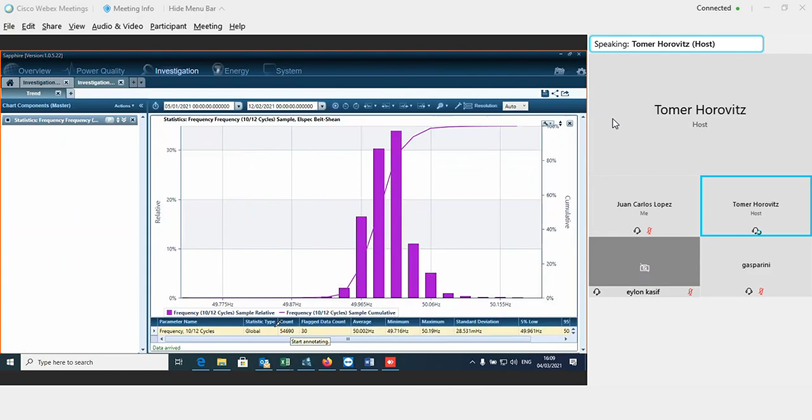When I'm saying all measured values, this is the number of values - 54,690, that I have in this period from the 5th January until the 12th January. Sorry, let me - this is from January to February. Let me take 1 week, as we said before.

So the counts are 10,078 values. This is the number of values we have in this period.

Now, this is the name of the parameter. And then we have this number, which is 2, for flag data count. Remember that I told you that in case there is a specific event, the system can or cannot, according to the user definition, ignore those values. So yes, we have two values which are being ignored.

And now the average is 50.006. The minimum reading is 49.81 and the maximum reading is 50.19. We have the standard deviation. Now the next side is the 5% low and 95% high. This is a concept that many times we use in the compliances.

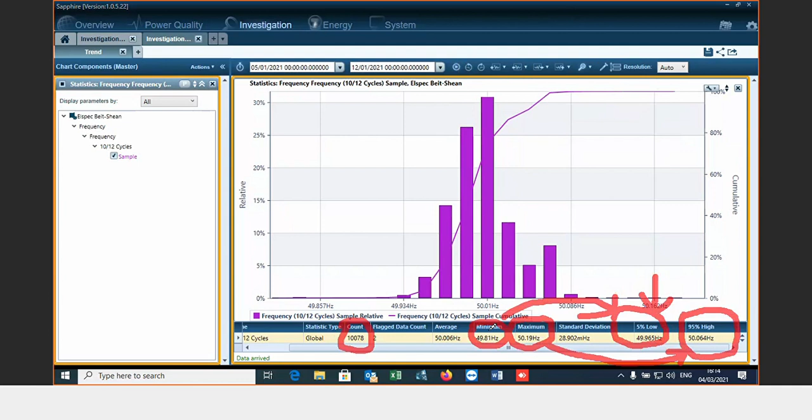Where you see the 5% low, it basically means that if you have, let's make it round, 10,000 readings, this is the minimum of the 95% highest, or the maximum of the lowest 5%. So you are removing the lowest 5% of readings, and vice versa with the 95%, ignoring the highest 5%. So this is the absolute maximum - the reading here will be a little bit higher than the readings you see here. And this is the absolute minimum, so it will be a little bit lower than what you see here. Clear? Okay, perfect.

So we now understand the lower part. Now let's go back to here. This fat bar indicates how many readings or values within this week, from those 10,000 readings, were between 50 hertz and 20 millihertz. So you can see there are 30.74% of the readings - that's like 3,000 readings.

And here, between 49.943, within those about 20 millihertz, you had 3.19% of the readings. Then we have this line. The line basically means as you move right, you go higher with the frequency, even to 50.086. So 99.86% of the values were below this value, and 0.14% were above this value. So obviously we will get to 100 here.

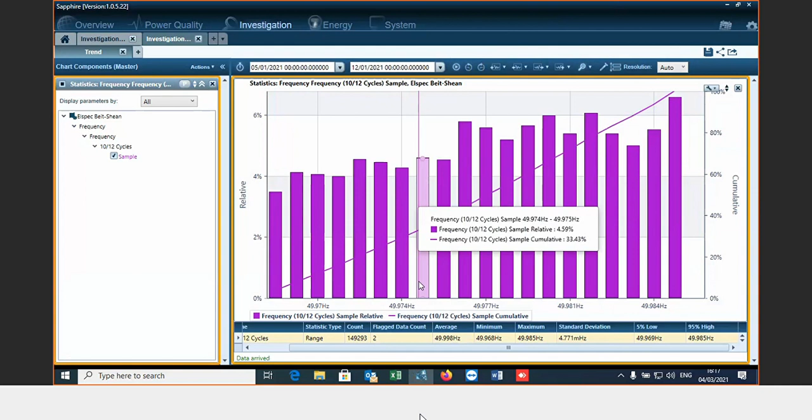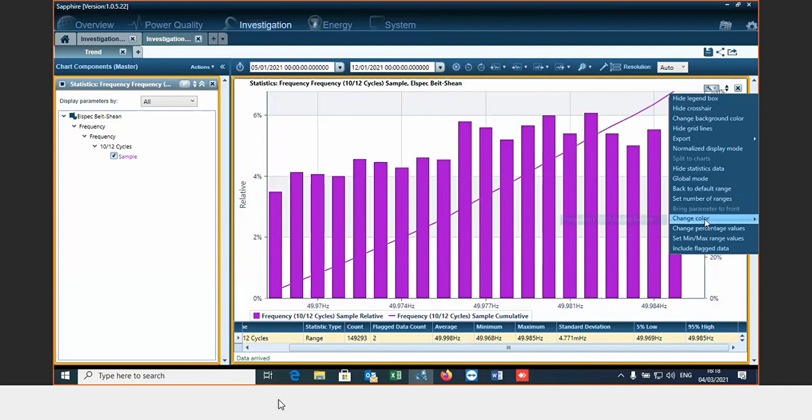Okay, then we can go back to default view, to the initial view here. And maybe one - include flag data. Remember, we told you it is ignoring 2 readings. In some cases it can be much more, but here only 2, but you can include the flag data. Then the 10,078 turns to be 10,080.

Sorry, it was not 10,080. It was... let me take... I think it's much more than that. I'm not sure how I can expand this. But okay, you understand the flag data concept.

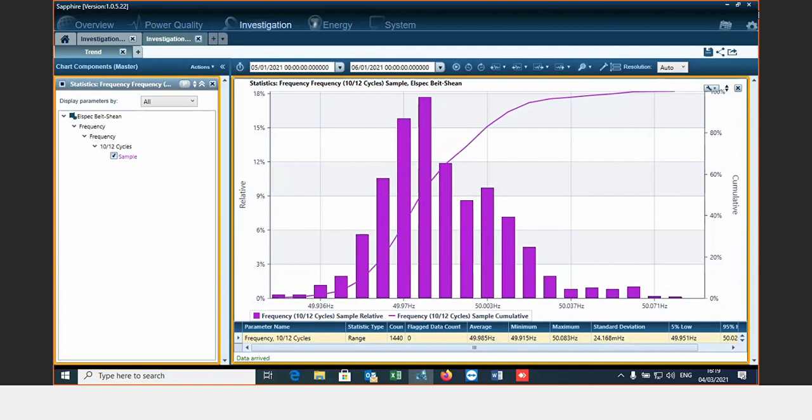Then you have change percentage value. We talked about the 5% and 95%. You can also switch this to 2%, so then you will see the 49.951 hertz change to 49.943. Also, you can change the 95% to something else as well.

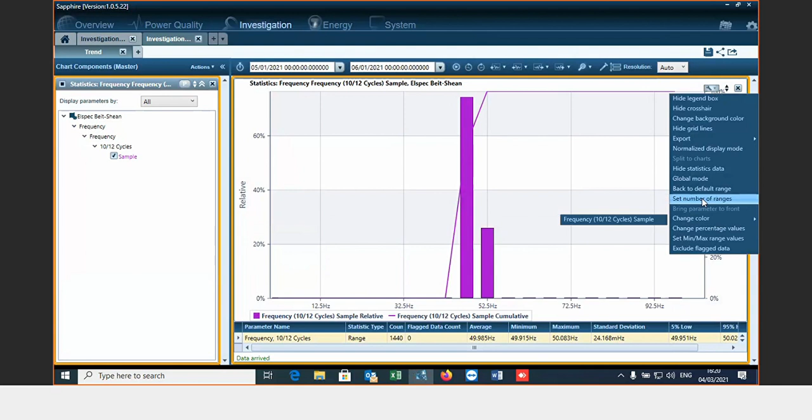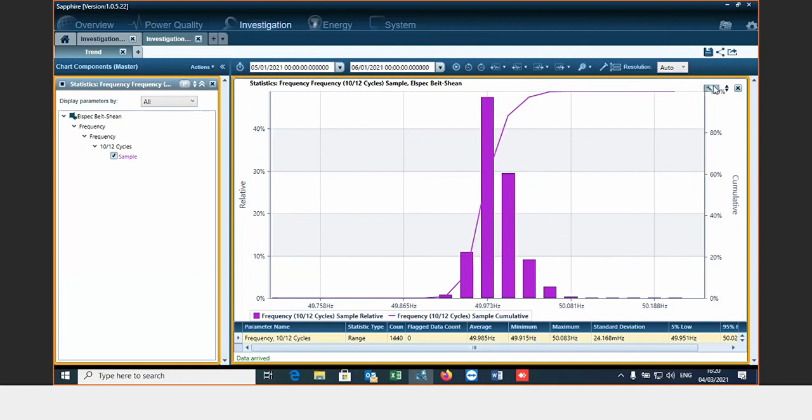Set number of ranges - okay, let me zoom in. By default, I think we have 24 bars, but we can change it to have more bars. So if I have 20, I can, for example, put the maximum - it's 48, but let's say it's 50. So now you can have much more bars. Okay, hide statistics data - this is pretty clear.

Any questions about the statistics chart? No, for me it's very basic. Okay, okay.

I have a question, Tomer. Yes, just a general one to understand.

Only I think managers maybe in a company would like to see statistics. What does it give you? A general overview of the health situation of your equipment. I guess first you can get an indication of what's the edges. Maybe you would like to see how many times it repeats for the generation frequency. So usually generation companies are more interested in that.

For RMS or voltage, I know this is important. First of all, you can find it in the compliance. You missed the last session. We talked about the compliance, but if you take a look at the report, I can just show you an example here of a power quality report that you will see a lot of, generally in this industry.

Not so much for a person like a consultant or somebody who is investigating a specific event. For those, the statistic is not really needed. But for those who would like to monitor the performance of the network, it will be more important. And if we take a look at the EN50160 example here. Paulo, you have a question?

No, Elon is nearby me, and I can explain it for him.

Okay. Yeah, as you can see, the EN50160 is pretty basic to use. This is the frequency definition in the chapter for fail or pass. So you can see it looks for 50 hertz plus minus 1%. This is 49.5 and 50.5. And they require this to comply 99.5% of the week. So this is the maximum and this is the minimum.

And if you take 99.5% of the week, it's not an indication that the network is good, because in 0.5% maybe you have a blackout, a power outage, so this is a bad network, though they may comply 99.5% of the time. So therefore, you need also the second condition. It's okay to be a little bit out of these boundaries, but not less than 47 hertz and not more than 52 hertz, which is -6% and +4%.

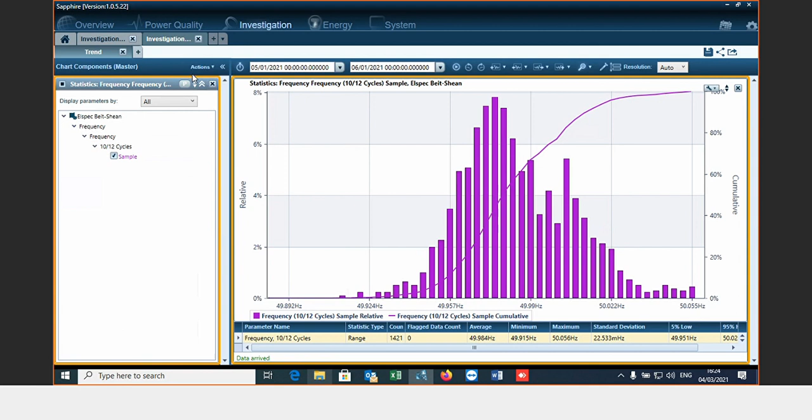So the next one, this is the statistics. Then we have scatter events. For scatter events, this is according to standard. This is a type of graphical representation of the events. According to, yeah, CBEMA is one of these. Let's take a look. If we take all of the events, let me zoom out again to have a little bit more events than only those two. So as you understand, every point is an event.

Now, there are some different standards. For example, for the semiconductor industry, I don't remember which one, but one is for the semiconductor industry, where they found a relationship between faults they have in their fabs, like production of chips or memory, like Taiwan Semiconductor, Texas Instruments, Intel, Toshiba, Samsung, etc. So they found a relationship, and they implemented some kind of graphical representation.

Let me look for the one, for example, with this. I think this was the, I don't remember, the NRS. Okay, so this is another one. So here they have regions: the pink region is for swells. This one is for sustained interruption, momentary interruption, undervoltage. Z2 has its own definition, T, S, X2, Y, Z, and swells.

You can find it somewhere here. Basically, this is an XML file. You can define it as a mathematical function or something that is shown on the chart, like the one we've seen before. Sorry, we looked before. There are differences. This is the one I talked about, semiconductors. But yes, you can define the line where each region will be shown. Okay? How to do this? This is an XML file that sits, I'm not sure where. Just a minute.

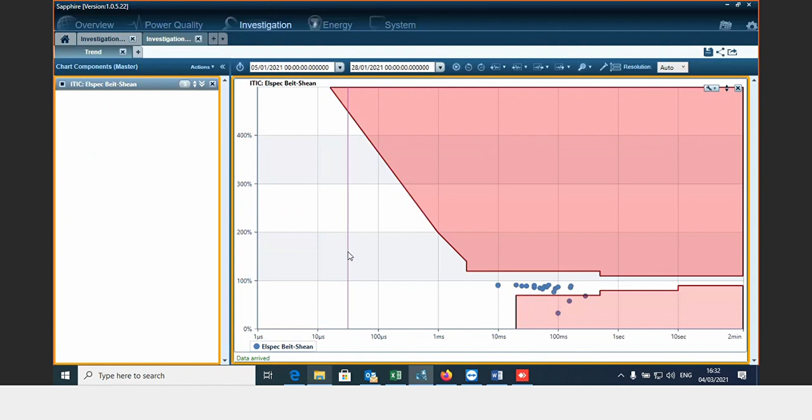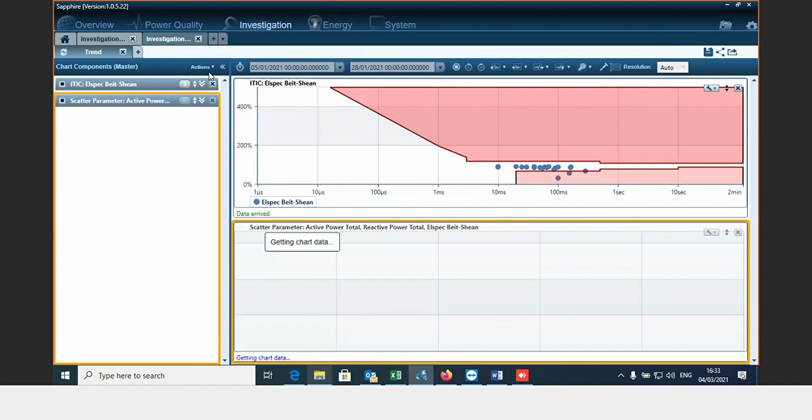Perfect, okay. So just one more thing, you also have the custom one. And for the custom one, you can specifically choose one of the standards, the layers, and split to different types of events. Okay, next one. So we have the scatter parameters. Scatter parameters basically allow you to select a parameter in reference to another parameter. So we can take the active power as the x-axis, and take the y parameter as, for example, the reactive power. And sometimes you get very interesting insights from the information. Okay, not in this case, but you can maybe change.

And let's take the y-axis as the RMS, something with power factor maybe. You can get some nice behaviors. For example, one of our consultants here made some research for a customer about low efficiency lasers for medical applications. So there were some very interesting insights or conclusions from that. But basically the principle here is that you select the y-axis and the x-axis and take currents against voltage, etc. Questions about this? No?

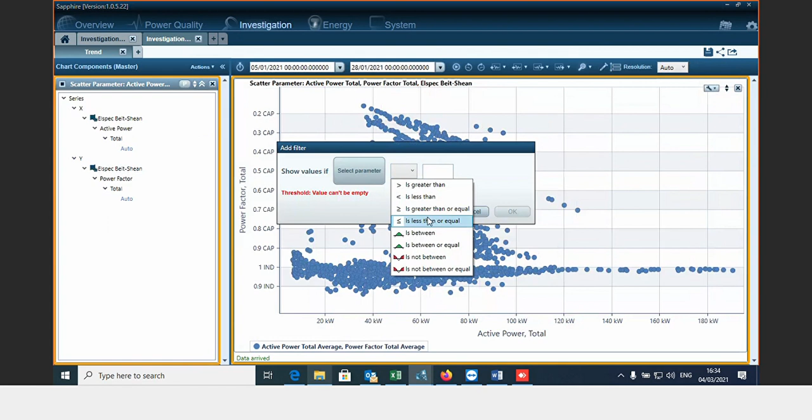Okay, the menu here is pretty clear. What's the filter on? I don't remember. Okay, so this is to show just specific parameters if you would like to filter some. But I didn't speak about the menu in the scatter event in the previous one. Okay, but I guess you want me to go back to the scatter event to talk about the chart menu? Maybe it's a little bit different. Should I go back? Okay, I will. So if I take the CBEMA, so here, let me see if there is something we did not talk about. No, that's pretty clear or similar to the ones we already discussed before.

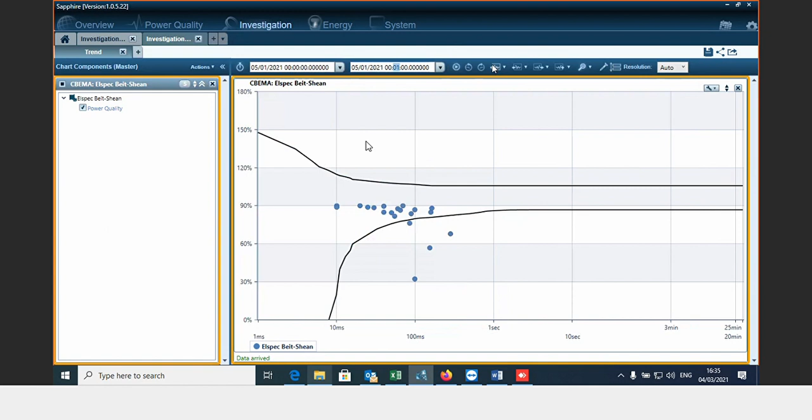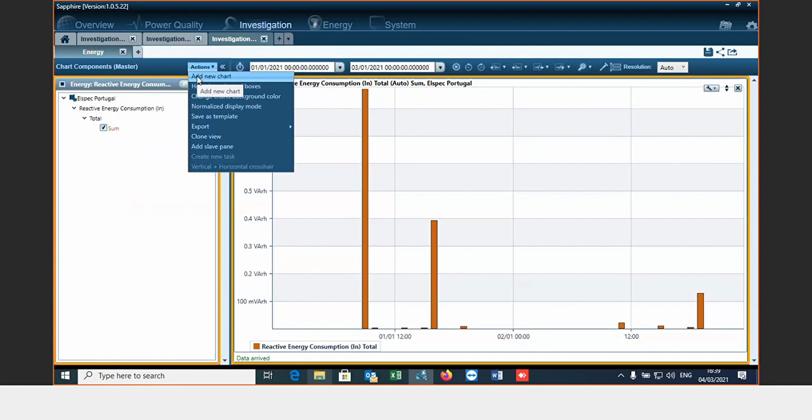Energy. You can select different ones here. Okay, it shows only Portugal. I thought I selected 3. Let's show. Energy. And also North America.

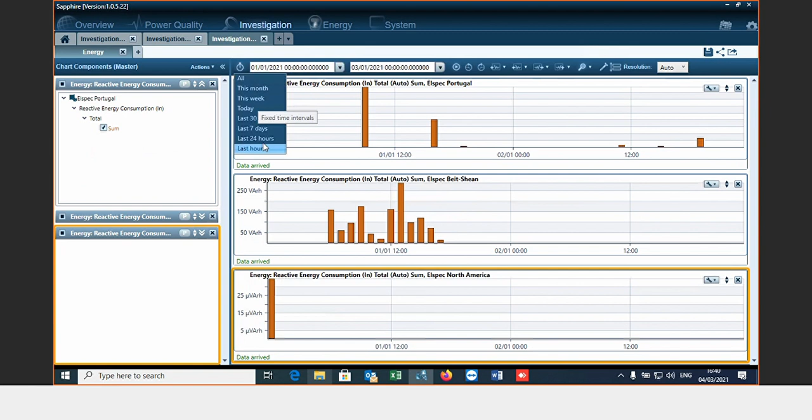Okay, and I also would like, oh, it was not recorded on the same day. I'm looking for one here that I can compare. Not sure what's going on with North America. Maybe they have only voltage connected and no current, so there is no energy. It's okay, here we can take this. When there is data in North America, there is nothing in Portugal and Israel. I don't have a good example for you, but let me look a little bit more.

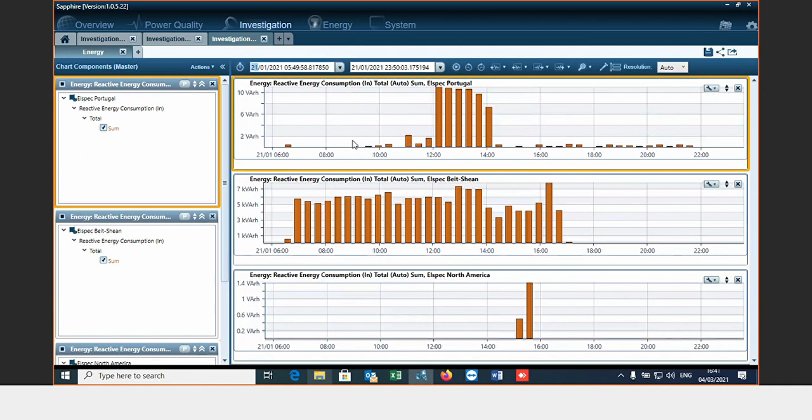Okay. Now I would like to change just

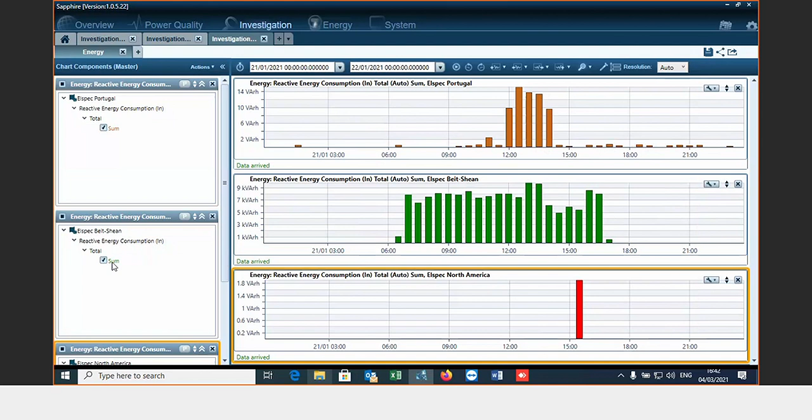Okay, so now we're talking about energy, but not the energy model. This is the energy chart. So I'm just showing here what the energy chart is. The colors are the same, so I will change the color to a different color. I will merge all by drag and drop of the parameter. So here.

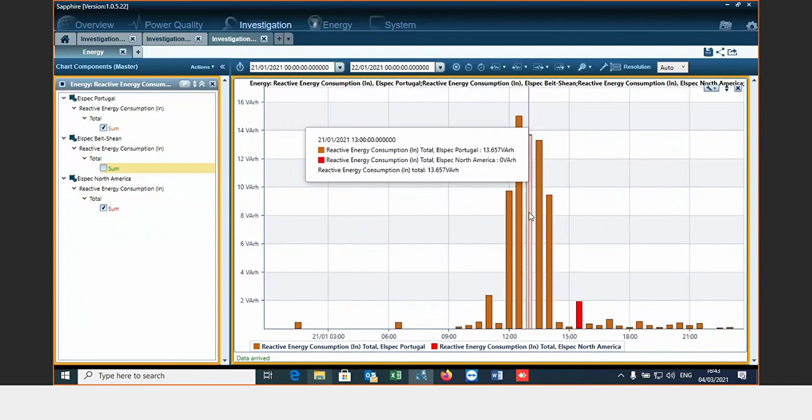The green one is Israel. It's just eating the others, so it's difficult. Okay, here you can see both. Basically, I also made some synchronization in time, so it took exactly 24 hours, and we have here 48 bars. The default is 48 bars; you can change this from client settings. Each one of those is 30 minutes of energy consumption.

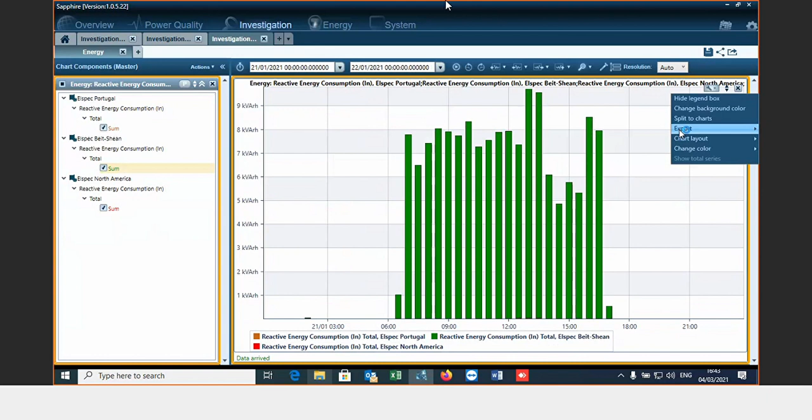Okay, I can put it back. I can export to Excel here, and I will get the exact reading for energy for 30 minutes in each one of those measurement points. So you can see midnight, then 00:30, 1 o'clock, 1:30, 2 o'clock.

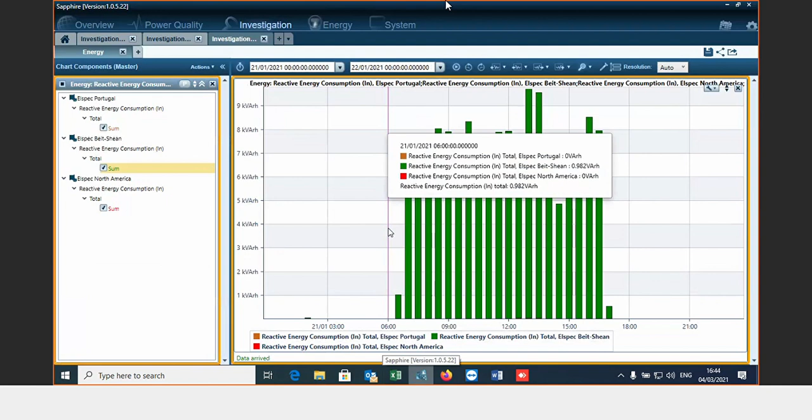Okay, so you can see that North America is very lazy. But Israel is working full power, and Portugal has this peak. Anyway, this is the energy chart. Any question about it? No? Okay, perfect. So the next chart will be the cyclic histogram.

Hugo, are you familiar with the cyclic histogram? Actually, it's very rarely in use. If there's one chart which is maybe not used, it's this one. Are you familiar with this one? No. I see. It's not so much in use. Let's go back here to this investigation.

Actually, to demonstrate it, I prefer to get the cyclic histogram referred to the samples. It's the only chart that uses the samples level, which is very high resolution. Therefore it's better not to request 1 day, 1 hour or one month; it will take a very long time to respond. So I will select a transient event. Actually, I prefer another one.

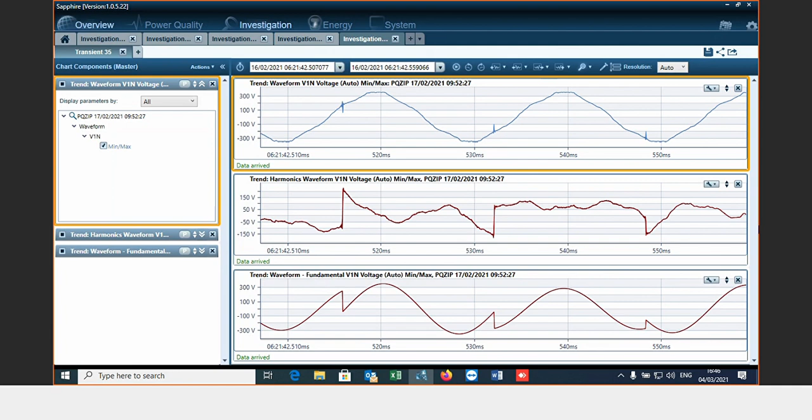Okay, let's take this. No. Sorry, another one. I'm looking for a good example to explain this chart. Okay. So let's open a cyclic histogram. Let me zoom out here before doing so.

There's no big disturbance here, just okay. So I will choose a cyclic histogram chart. And this is a feature we were requested to implement about 3 or 4 years ago by EPRI, it's an organization. Not sure if you're familiar. Choose one of the phases.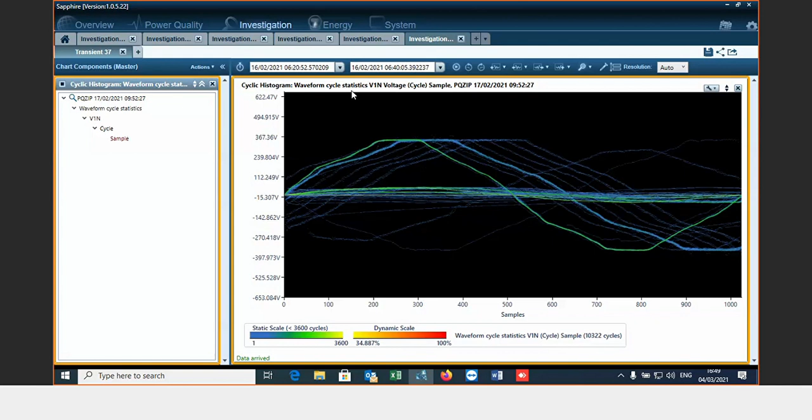Actually, I'm not sure the example I took is very good. This is a very, very messy signal. Actually, I prefer to take another example. Let's do the following. I will add a chart here to see the events, only power quality events. I will delete this, and I would like to see here one.

When I'm looking for an event, I usually cannot find events if I'm looking at 1 minute or 2 minutes. I would take more. So as you can see, for each chart, you might need to adjust what you are looking for. Now, if I group this, here is a transient. I will open this transient. I think that's the one I've seen before, and it's a very good one to demonstrate the cyclic histogram. Yeah, this is exactly what I was looking for.

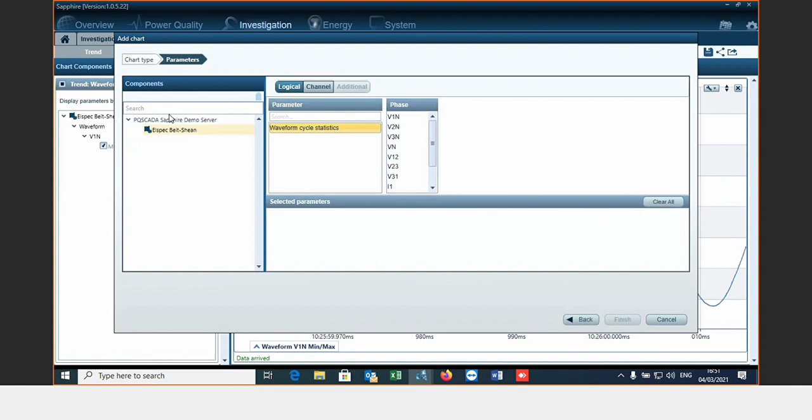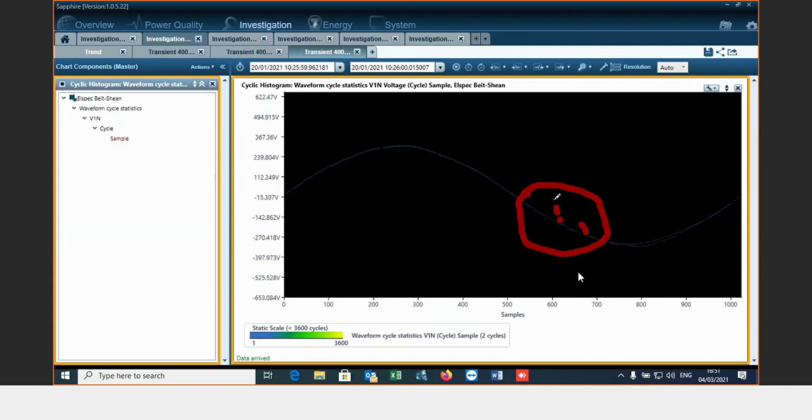Okay. Now let me know if you can see the points in here. Can you see it on the sharing option? No, Tomer. You cannot see it? No. I only see the line itself. Yeah, the line is because we are now looking at 2 cycles. Just believe me that of the 2 cycles, one goes as expected, while the other one has some kind of disturbance here.

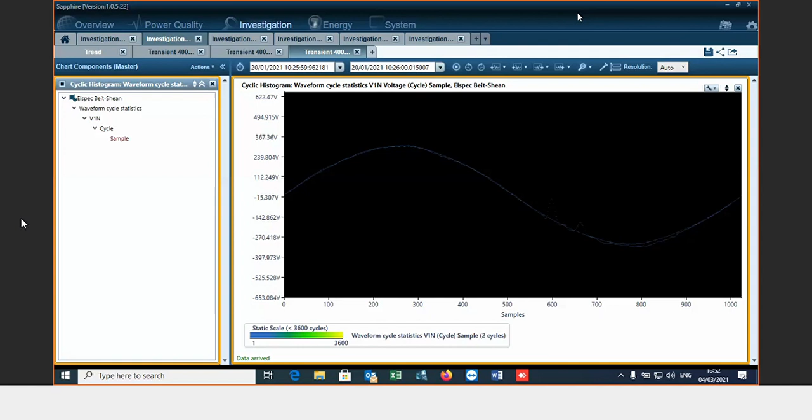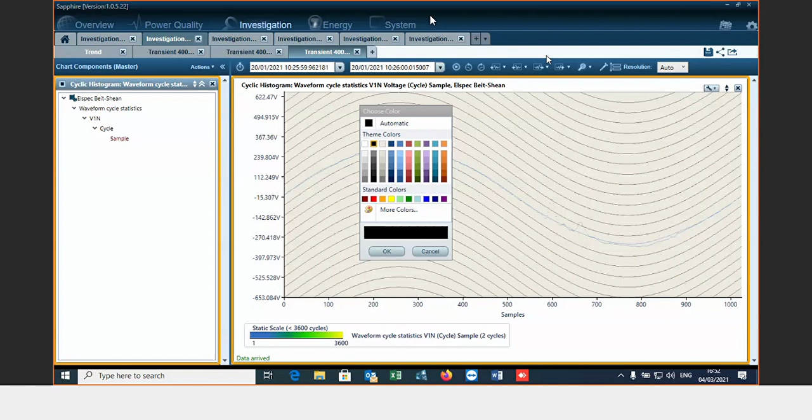Sorry, maybe to switch to. Yes, I have a presentation, but maybe you will see it better. No, not so much. Okay, let's go back to black. Now I can see it. Okay. So you can see here some kind of differences. So basically, what the cyclic histogram comes to show you is the deviation of the samples.

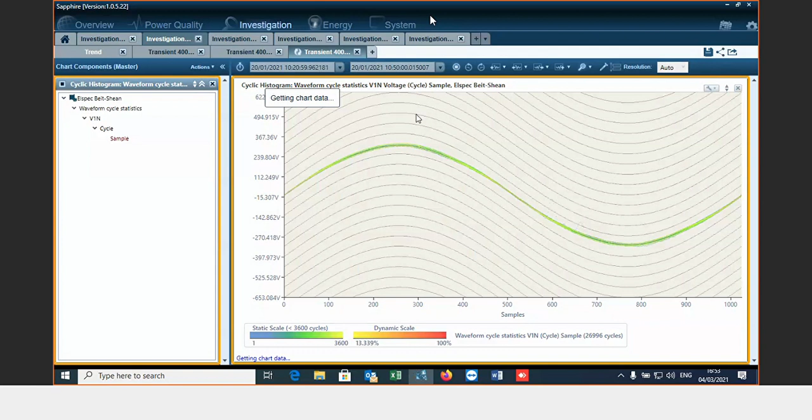Now, if I take a much longer time, the response time will be a little bit slower. So you can see the index color. And if I take it even more, now we are looking at 27,000 cycles. And now I am asking for 20 minutes more, so we are basically looking at half an hour. And you will see this is the color index. So you can even see a repetition in a few different locations. Can you see this? Yes, yes.

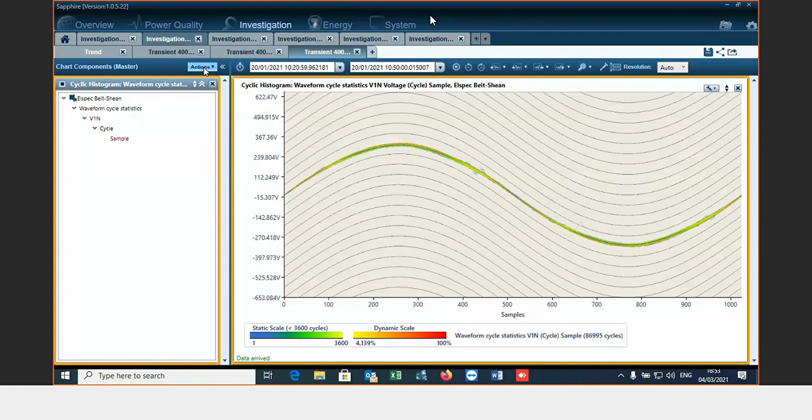So that's definitely this type of chart. I don't think it's suitable for the common customer. And that's why even Hugo and Paulo, you're not familiar with it, because I don't know of many customers who use it, but it's also one of the charts we provide. So we covered most of the charts, just about the cyclic histogram, about each one of the charts.

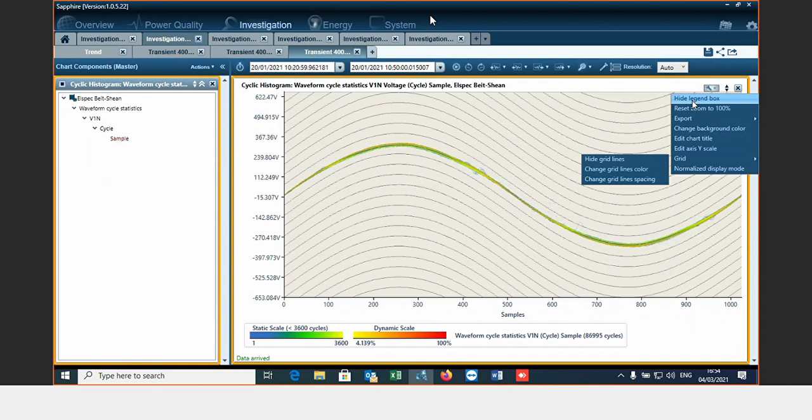I show you the different types of options in the menu. So here the special one is maybe the normalized display mode. Okay, so you can see it when it is normalized. Okay.

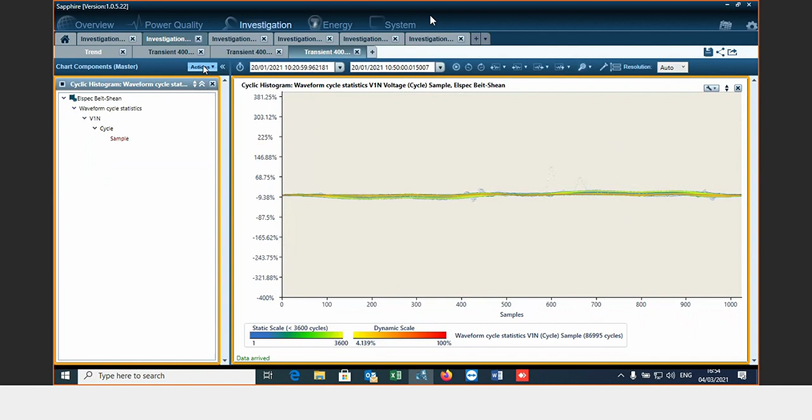So the next chart is the summary. The summary is similar to the grid, but the grid shows you per specific period, like 10 times in an hour or so. And here it's just showing you over the full period what is the minimum, the maximum,

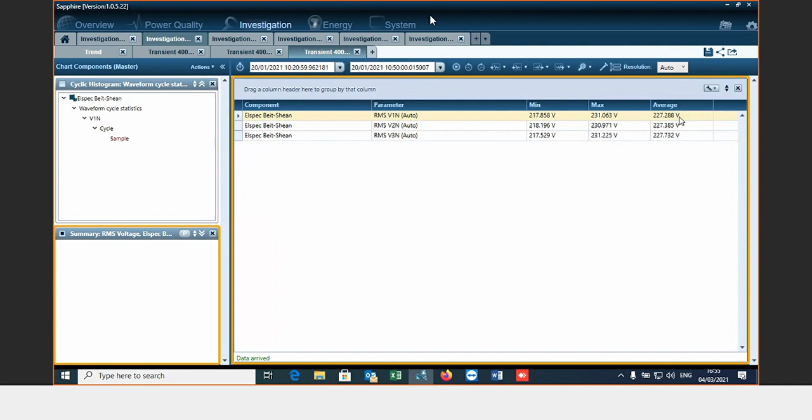and the average. So here we take a look at 30 minutes. Within these 30 minutes, you can see the minimum for V1, the maximum for V1, the average, and the same for V2 and V3. Okay, so we covered the charts. Just to remind you, and just stop me in one of those if you have a specific question.

So we have the trend chart. X-axis is the time, and y-axis is the value. You can also normalize it in reference to nominal. Then we have the grid, which is a table. You define the resolution and it shows you the min, max, and average for every period.

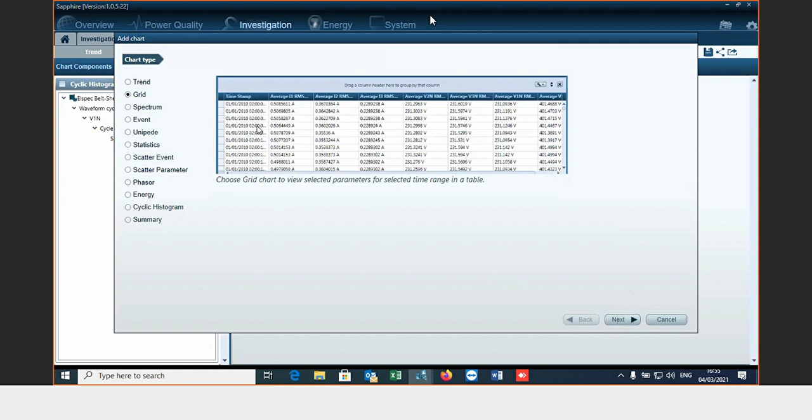Then we have the spectrum. We can see the harmonics. We also explained that in case you use Express, you only see 50 harmonics. In case you have a licensed software, you can see it per the hardware spec. So if it's 1024 samples per cycle, you will see according to Nyquist half, 512. If it's 512, you will see 256.

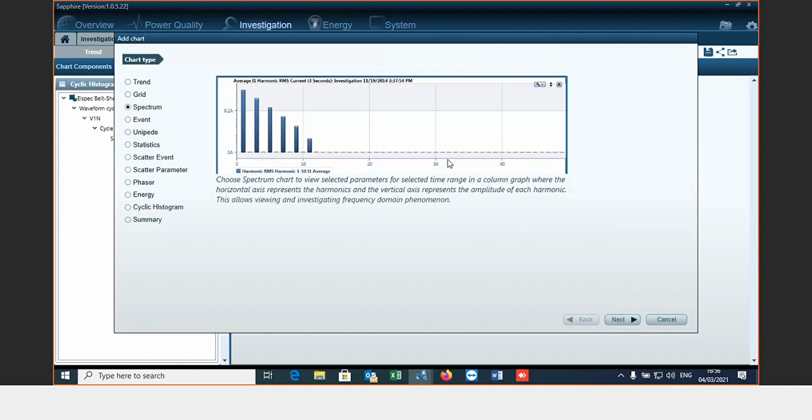Okay. Then we talked about the events. We talked about what is the severity, what are the possibilities in the chart of this one, and what is flagged data or not flagged data. We also mentioned this and the mask events. Then we talked about Unipede, which specifically regards the EN50160.

Then we talked about statistics. You also had some questions about what is a possible application for this. So we also talked about this, and how to do some playing around with this. And as I said, this is very interesting usually for distribution companies. Then we talked about the scatter events.

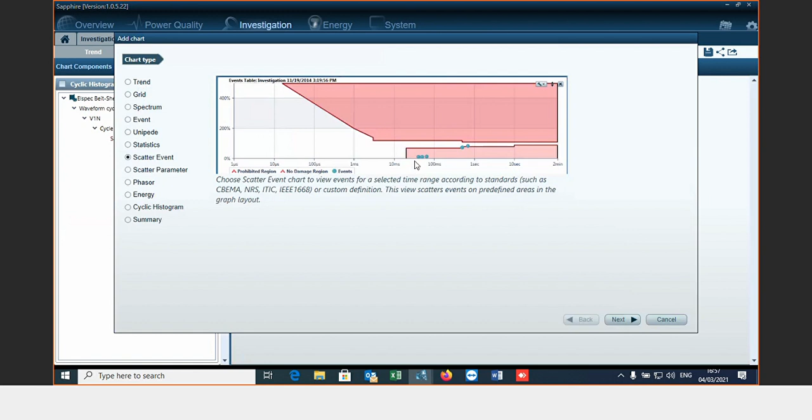I need to check for you guys about how to implement a new standard. Definitely we can do it with R&D, but if you have the tools to do so in XML, to put some kind of mathematical graphical function or parabola or something. So I think this is possible, but I need to check exactly how and where.

Then we talked about scatter parameter, phasors, energy, and cyclic histogram. Any questions about any one of those? No? Okay. We finished with the investigation module. I planned today also to go over the system, the configurations of the server and the components, but it's already

But what we still have: the G4K took one session, and the Sapphire is already 3 sessions. So we'll need another session to talk about the energy module and the system module. And also I need to explain about the task mechanism. We mentioned this today, but that's something we should talk about. So that's what we will do in the next session. Wednesday, is it okay? Okay, yes, should be okay.